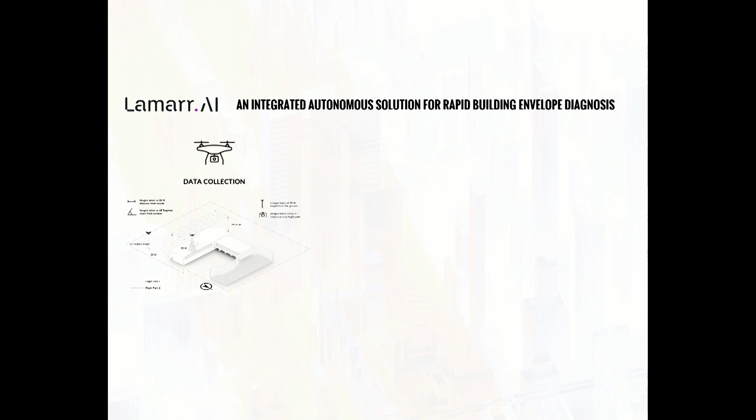How our technology works. So our technology consists of 3 key components. The first one is the data collection with drones. So over the past years, we have been developing the right flight paths that are suitable to collect the data with RGB camera and infrared camera. So we do 2 flights separately. And then our proprietary computer vision and machine learning model basically identifies where these anomalies are and classifies them.

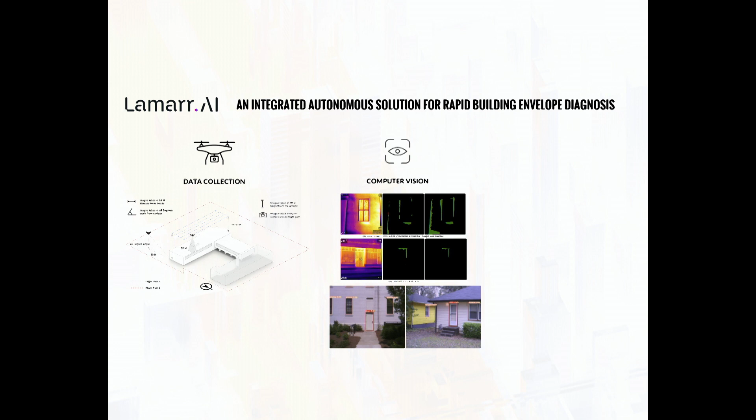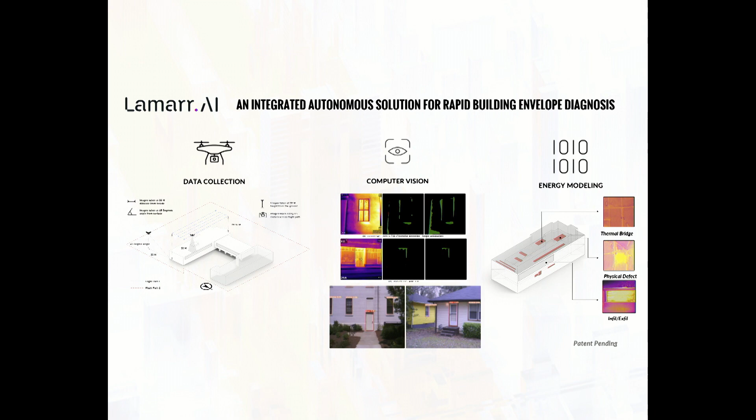So this is the innovation in using computer vision, that we collected thousands of data that were labeled by building scientists who are experts in that space. And then we tested the performance of the model to identify that the model can accurately predict the classes of each anomaly. And then finally, the most important step, these anomalies are translated into geometry that are registered to a digital twin that could be directly integrated into building simulation models to identify the right retrofitting strategies and evaluate return of investment on these strategies.

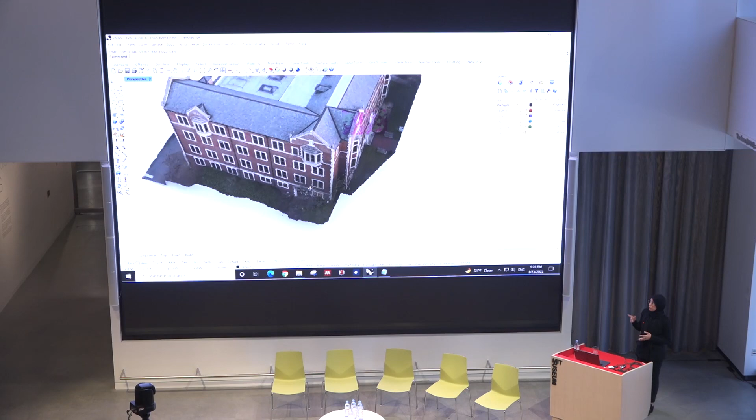So right now, our service kit consists of 5 key components: flight planning, data collection, image processing for both RGB and infrared data, geometry construction from photogrammetry, and finally, energy modeling. I'll just show you quickly, this is a video from one of the flights that we did. We worked with community groups in New York. We also work with the campus facilities in Georgia Tech and MIT.

This is one of the buildings in Georgia Tech where we tested the entire workflow to identify how fast or accurate we are compared to the traditional methods, up to the registration of the anomalies, which is the geometry you see here.

Also, we have been developing a prototype of a software that could be used by regular homeowners who are interested to inspect their buildings and identify where the problematic areas are, where you can just capture with any thermal camera, even an IR FLIR extension for an iPhone, and you can upload the images directly to our software and it can tell you exactly in each image where the anomalies are and what type of anomalies they are. And this is very fast, so it can process 1,000 images in 128 seconds.

These are some of the expert studies that we have done. This is one of the data sets that we collected in Georgia Tech, where we validated the model performance using expert opinion to identify how accurately the model can predict. And right now, our model can predict with 89% accuracy.

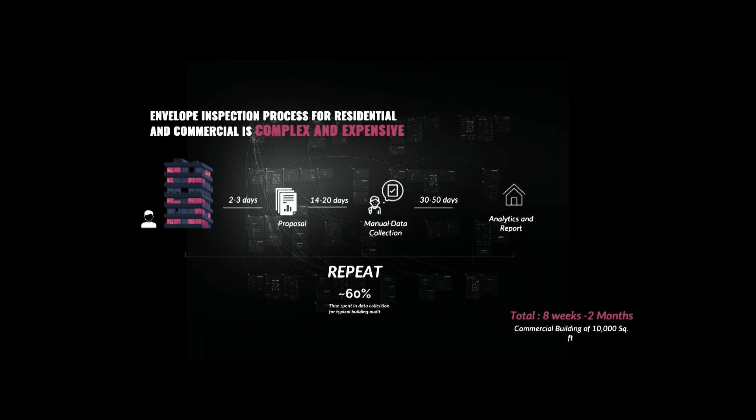So with this process, we basically cut down how it's done right now. So like I mentioned in the beginning, it could take around 14 to 20 days only in identifying the right building auditor, up to an additional 50 days to do the data collection, and just to deliver some information within 2 months. With our technology, we can cut down the entire process into 1 week for a typical building of 10,000 square feet.

So through these pilots, we have identified and confirmed that our technology can save around 85% of the time spent in a traditional building audit. It's also much cheaper. It's 90% cheaper compared to the traditional building audit that's done right now. But most importantly, we are safer and more accurate because we're using drones, and we're cutting down any kind of safety concerns that building auditors might face in high-rise buildings or even other conditions.

So compared to our competitors, we are at the top of autonomous processing across these 3 components, which are aerial data, thermal inspection, and energy modeling, because our software integrates all these 3 components in one single platform, and it's fully automated. How we have been looking at our revenue model.

So right now, we're more on the subscription-based model for large property management companies, who are our key clients, where they can collect the data and get diagnosis more on time, and then can get some recommendations on what type of repairs could be done, the return on investment of these repairs. Also, some standardized reports on code compliance requirements.

Our next step is transitioning to the do-it-yourself market, so working directly with homeowners using the Lamarr app, which is currently in development, where people can capture any kind of imagery with FLIR, mobile camera, or a handheld thermal camera, not necessarily drones, because our model also works with handheld data, and they can get some repairs on what type of material they could use to identify their building's performance.

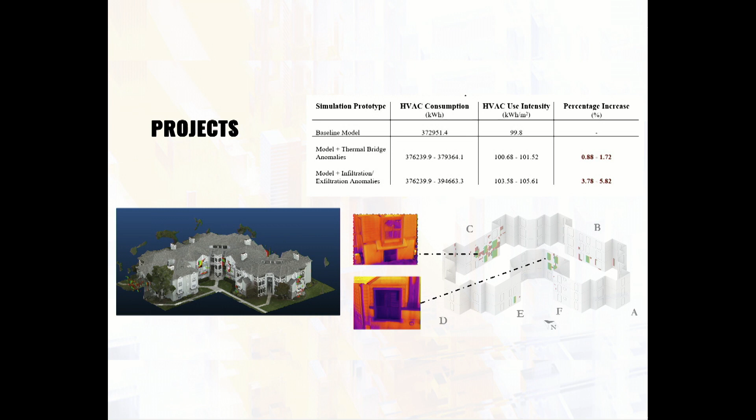And we use that information for thermal energy modeling, which is the table you see on the top, where we can identify how much HVAC energy use saving you can achieve by tackling these anomalies.

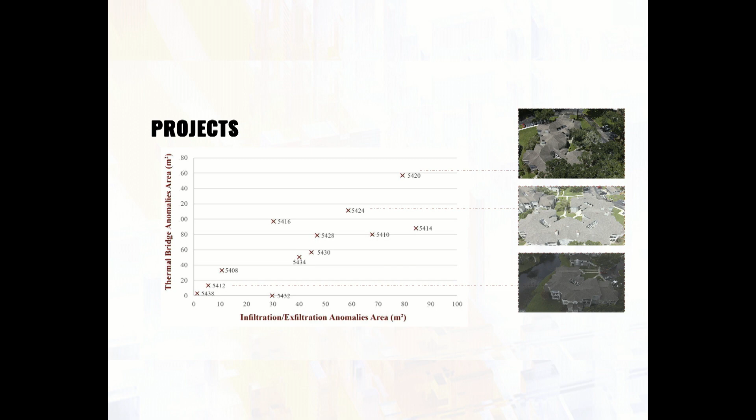So with this project, we identified that this technology could also be very useful for decision making, because if you have a property of 20 buildings and you want to see which building to prioritize in your intervention, you could also benchmark buildings against each other with respect to anomalies, areas, and number of occurrences in each one. And we identified through this project specifically that there could be some clustering of buildings that are considered performing well, and others that are at the edge of lower efficiency.

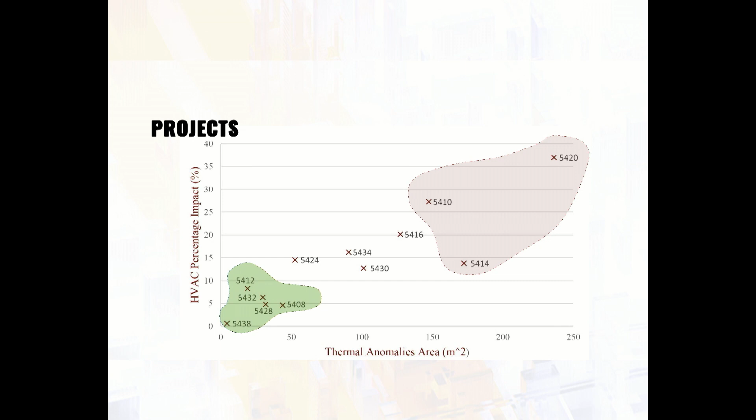So this project was particularly interesting for us to showcase, because these are the same buildings that were constructed by the same contractor, the same construction company. They are situated in the same setting. So we were wondering what really caused this large deviation, where some buildings are at the top of lower performance and some buildings are performing much, much better. So that goes back to the climatic factor and how much each building is exposed to sun and different situations, and also the use of the building and the operation.

So our use case actually cut down the time that would be spent on a property like this from 6 months, and we completed this in 1.5 months. It was a very interesting project for us because we took the technology from the research project and we wanted to understand how we can make it an actual product that people can use. And that was a very good exercise for us to really understand how we can automate, how we can improve the output, what the data looks like, how the client could actually use the data. So that was a very interesting project for us.

Our team is very diverse, from building technology, urban analytics, machine learning, and computer vision. And we believe that we came together with the right skill set to tackle this problem that we're facing. And this is the same team that started the research that was funded by the Department of Energy 6 years ago. Right now, we have four full-time employees. 2 of them are actually fresh MIT graduates who joined us during the research and are continuing to work with us.